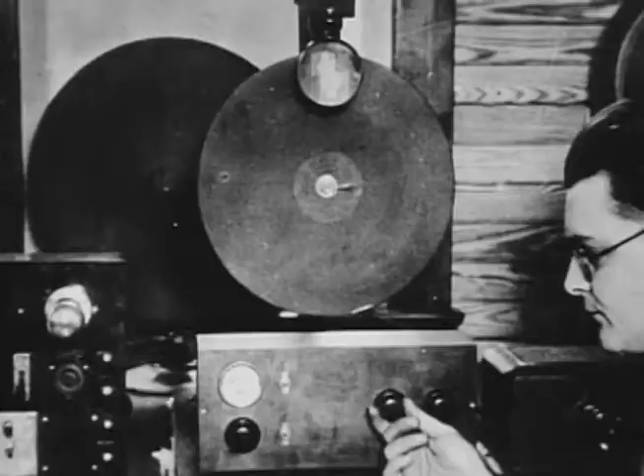Television promised precision and distance, increasingly essential aspects of an increasingly airborne conflict. An autonomous weapon could keep the pilot clear of enemy defenses. An accurate autonomous weapon could pinpoint a power plant and spare the neighborhood around it.

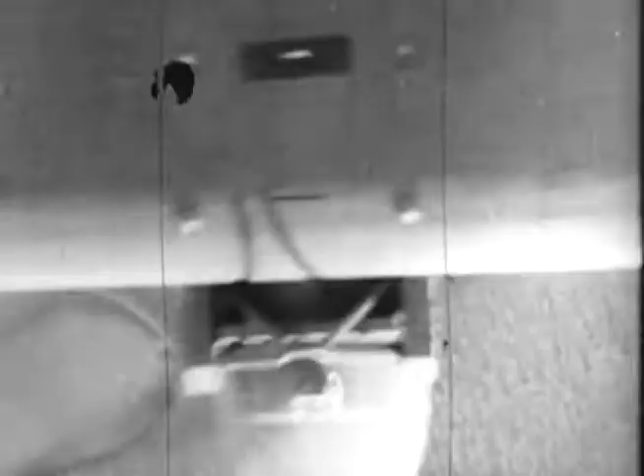That early TV technology was applied to glide bombs, small drone aircraft, and worn-out bombers packed with explosives. Weary Willy B-17s and TDR assault drones saw little combat, but proved prophetic once the technology caught up.

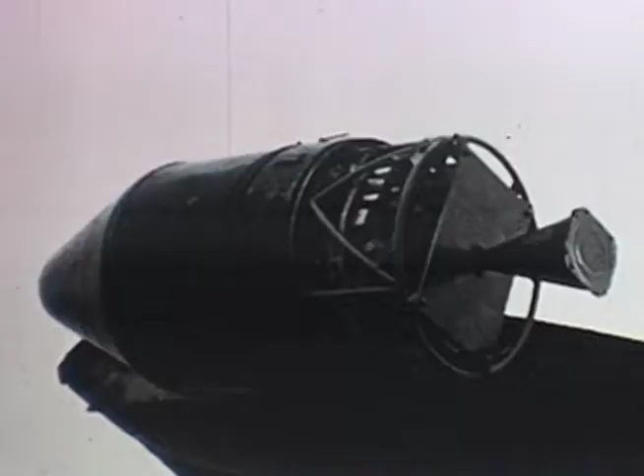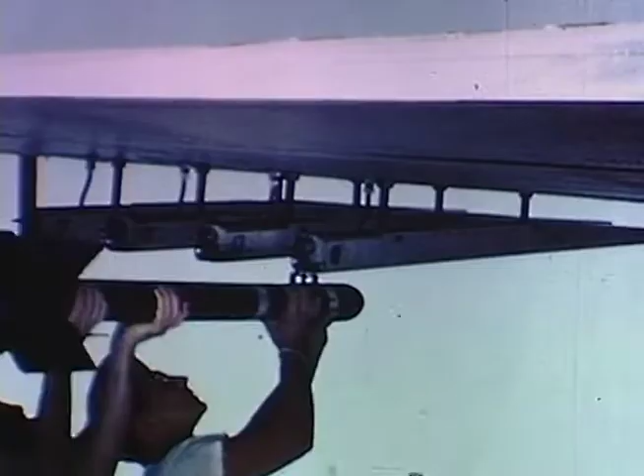Following the war, China Lake continued investigating almost every potential guidance technology imaginable: radio and radar, visible light, infrared, active and semi-active and passive, command-guided and fully autonomous. China Lake experimented with scores of schemes to put rockets and bombs and torpedoes on target, creating increasingly sophisticated evolutions of the rocket sights of the 1940s, and at the same time putting its fire control tech into the rockets.

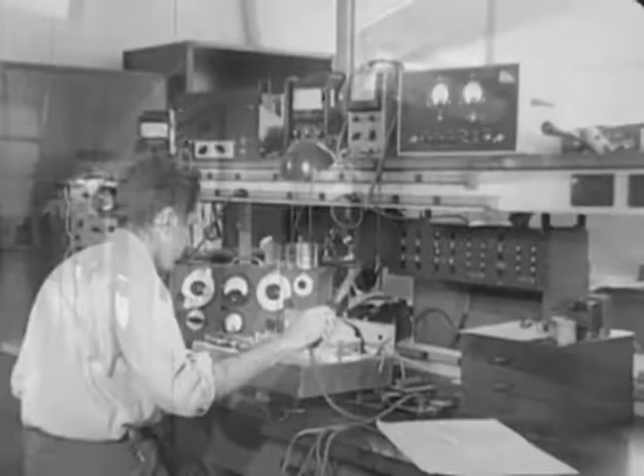And in an era in which electro-optical technology, TV, was at the cutting edge, the station was already working toward the application of its promise of precision to new generations of weapon and aircraft systems. From television-centered experimental fire control and bomb directing hardware came the ideas for an automatic tracking television guidance system.

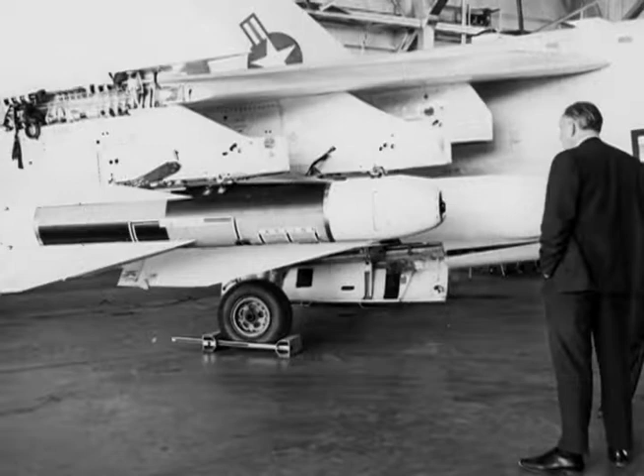Such a device had been demonstrated in 1953 at NOL Corona, but the technology of the day still didn't well support the dream. By the late 50s, though, a group at China Lake had begun demonstrating the technology and hardware for what would become the first successful autonomous electro-optical guided weapon, Walleye.

Walleye demonstrated just how accurate the TV camera could be. And the weapon's combat op-eval successes became legendary.

Larger, longer range, and data link versions followed quickly in the original Walleye's wake. And a powered version, Condor, was developed with industry for even longer range capability.

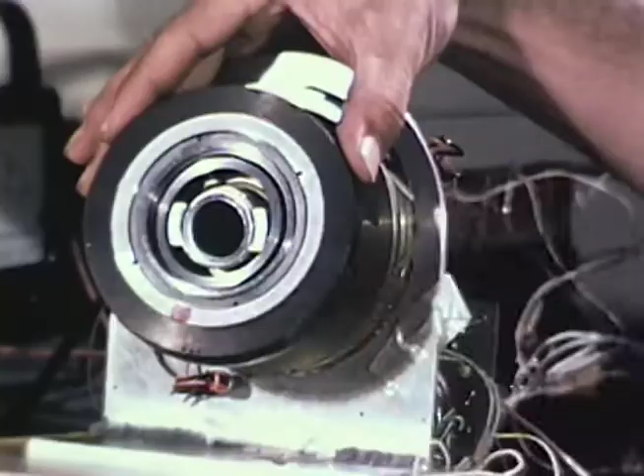In the opposite direction, China Lake designed a tiny TV missile, the Snipe, to give helicopters and light aircraft an unprecedented precision attack capability.

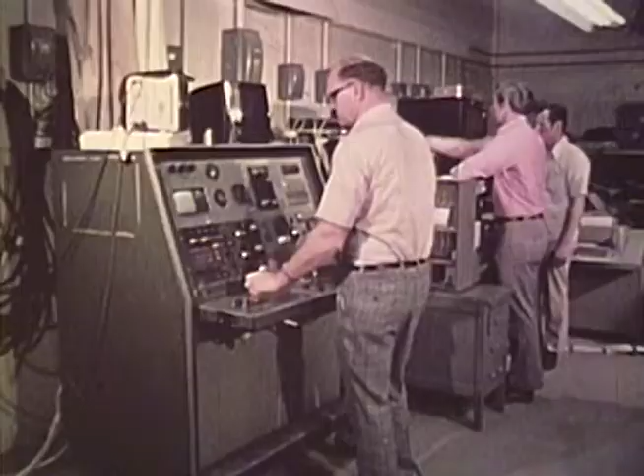The China Lake team also continued fusing TV technologies into fire control systems, such as ARBs for Skyhawks and Harriers, and early automated weapon targeting systems.

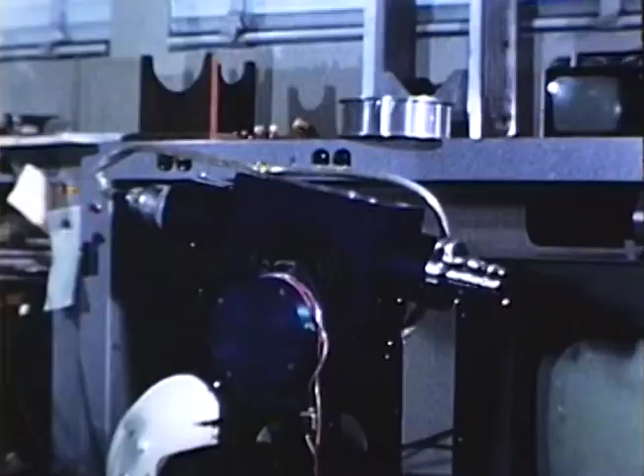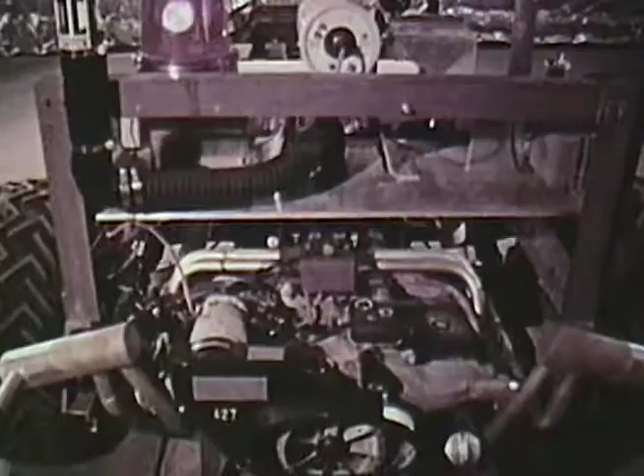The station ran the technology out to the ranges, too, with both in-house innovation and off-the-shelf application for data collection and drop scoring and event control. The station put TV into sophisticated remotes to support T&E and simulation as targets and as test platforms.

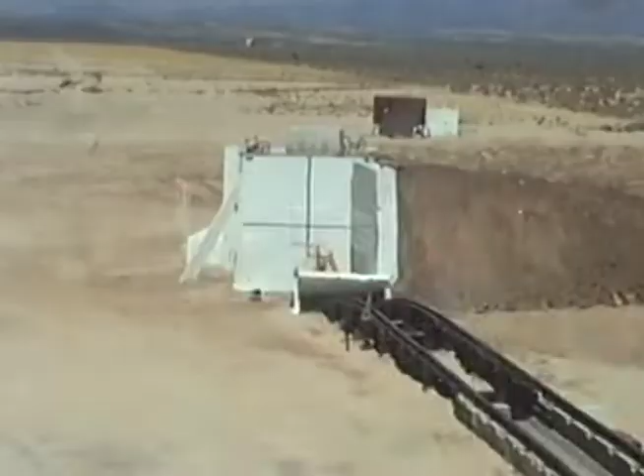And China Lake presented full-on fighters to its developmental missiles. China Lake's instrumentation efforts also resulted in the creation of the shuttered video technology that would become industry standard.

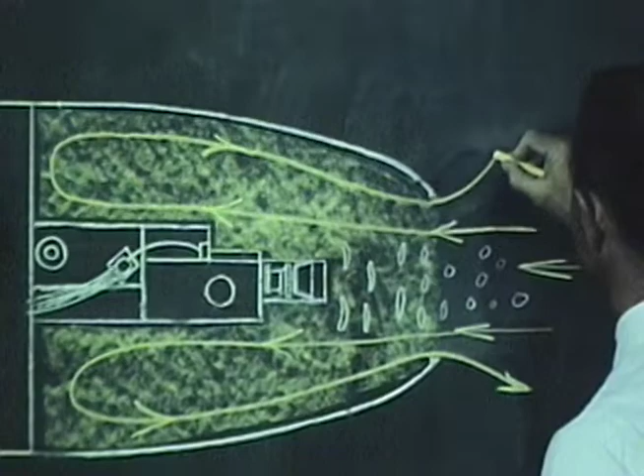And many of today's lumbering giants of the battlespace, weapons little evolved from the convertibombs that tried to displace Walleye in its early days, owe much of their seeker and data link technology to those China Lake efforts, as do the guidance systems for harpoons that turn them into SLAMs, and the radical CCD imagers for air-to-air missiles.

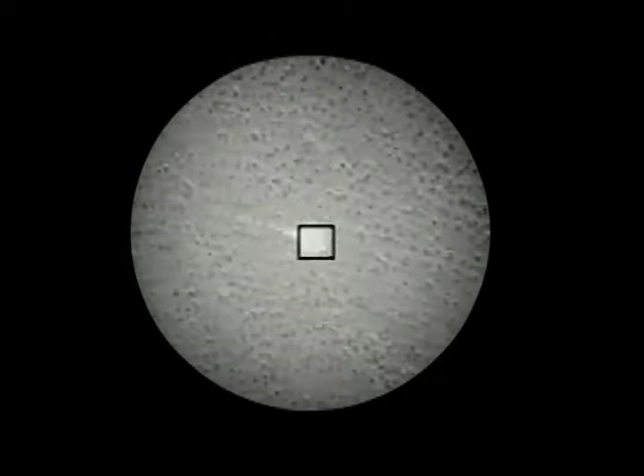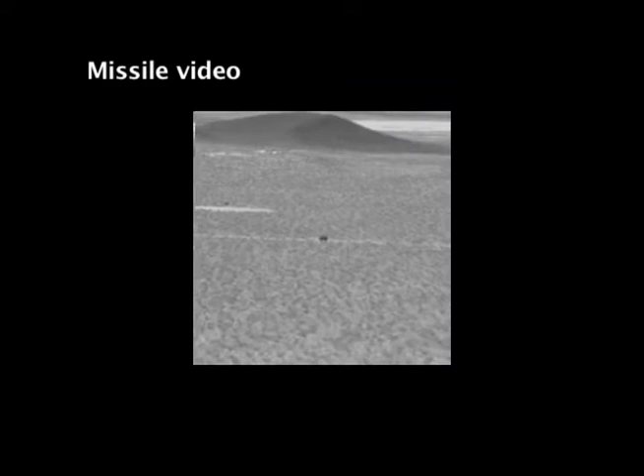And a new generation of imaging technologies has spawned a new generation of weapons. Tiny, elegantly simple, and unerringly accurate, whether fired from ship or shoulder, helo or Hummer, rubber boat or toy plane. The little Spike is a new kind of weapon for a new kind of war.

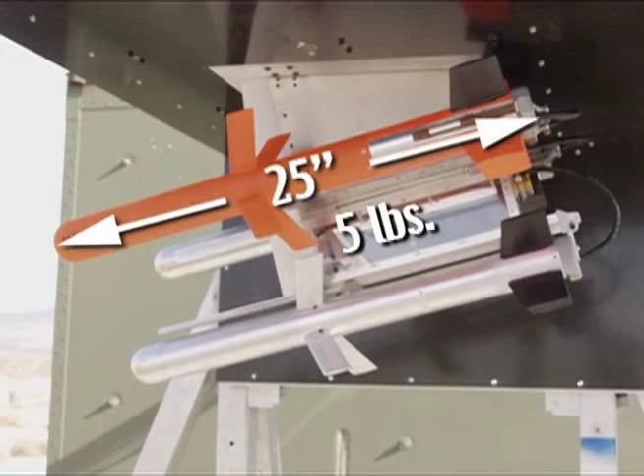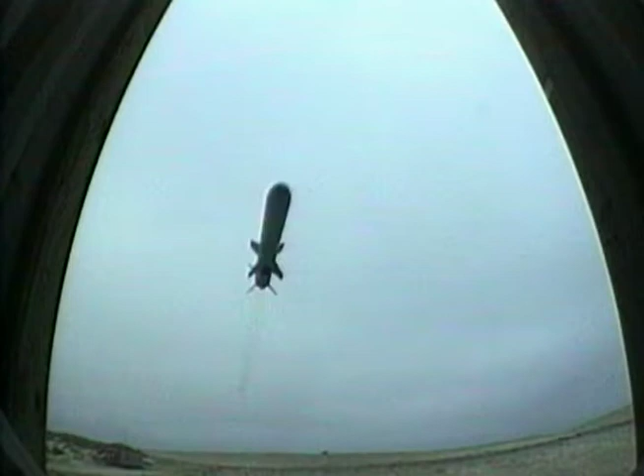The pursuit of precision continues, with the electro-optically eyed descendants of Weary Willie and Walleye wearing imaging seekers that are as far from the TV guidance packages of the 1960s as those were from the mechanical TV scanners of the 1920s.

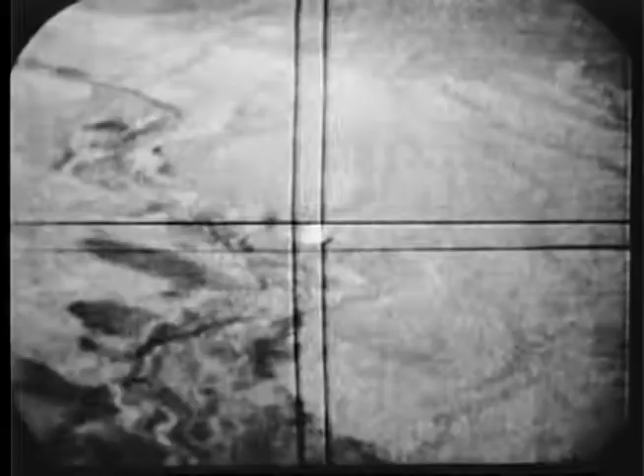Compact, computer-packed automatons with seekers that can see through haze and darkness to pinpoint targets from the air and from the shoulder, with the ubiquitous offspring of the data link pods controlling nearly everything in the battlespace arena. But that's another story.

Bombing a well-defended tactical target has always been a difficult mission. Anti-aircraft fire harasses the bomber in the target area, reducing his accuracy well below scores achieved during training missions. Operational commanders must therefore send out more ordnance to knock out a specific target, but they are hampered by not having enough aircraft to cover all significant targets in any one combat area.

One answer to this compound problem is Walleye, a glide bomb developed by the Naval Ordnance Test Station. This revolutionary weapon is guided by a self-contained automatic tracking television system, which frees the pilot of further control responsibility after launch and allows him to escape or attack other targets.

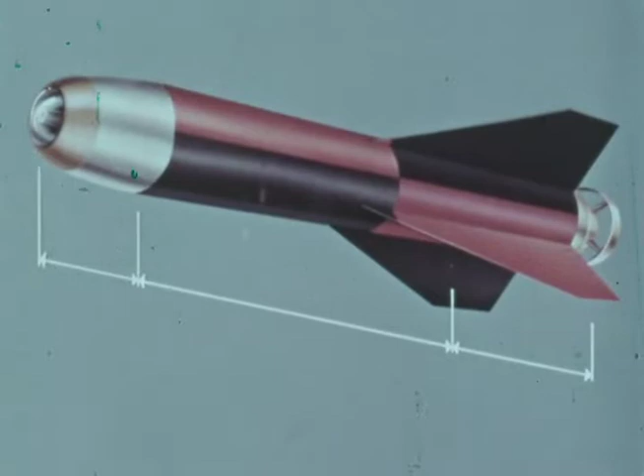The 1,100-pound Walleye is 11 feet 4 inches long, 15 inches in diameter, and has a 45-inch wingspan. The weapon consists of 3 basic sections or subsystems: guidance, warhead, and control. Over 80% of the total weapon weight is warhead. The high payload-to-weight ratio is a benefit derived from the absence of a propulsion unit.

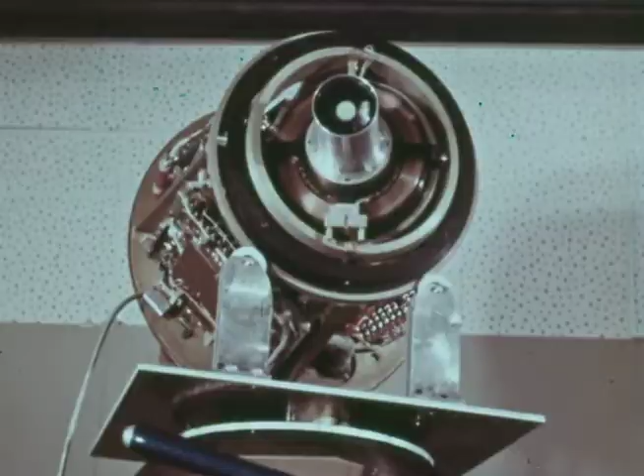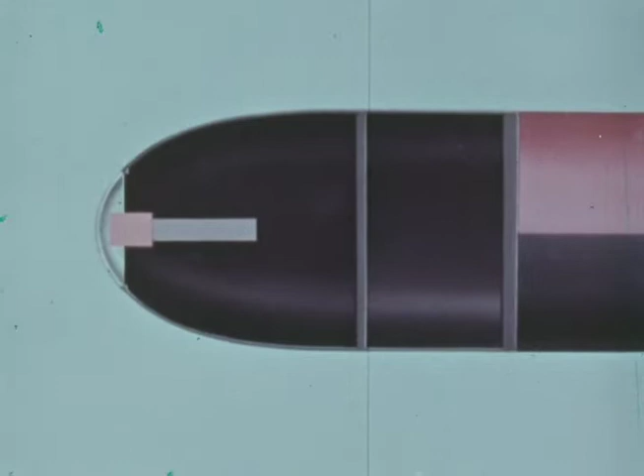The Walleye guidance system combines a gyro-stabilized television camera with a passive, automatic tracking system. The sensing element is the camera, consisting of a lens and a Vidicon tube mounted coaxially with a gyro. The assembly is supported by a gimbal system which allows the camera to move through an angle of 30 degrees in any direction.

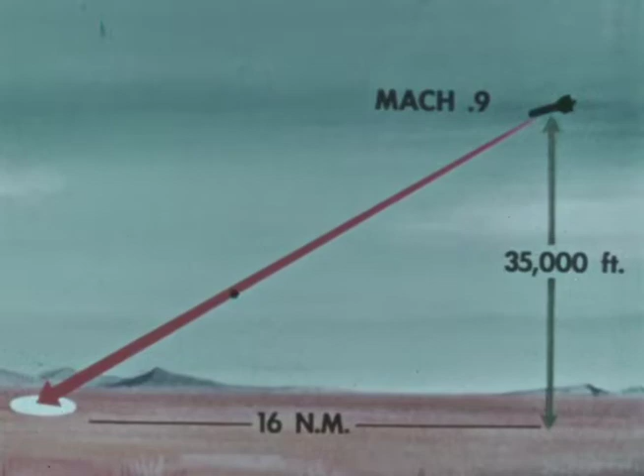After launch, Walleye takes a glide path instead of a short ballistic trajectory. Under nominal launch conditions of Mach 0.9 and a 35,000-foot altitude, Walleye can attain a maximum range of 16 nautical miles with a glide ratio of 3 to 1. Launched as low as 200 feet off the deck, the weapon can glide for 4 nautical miles.

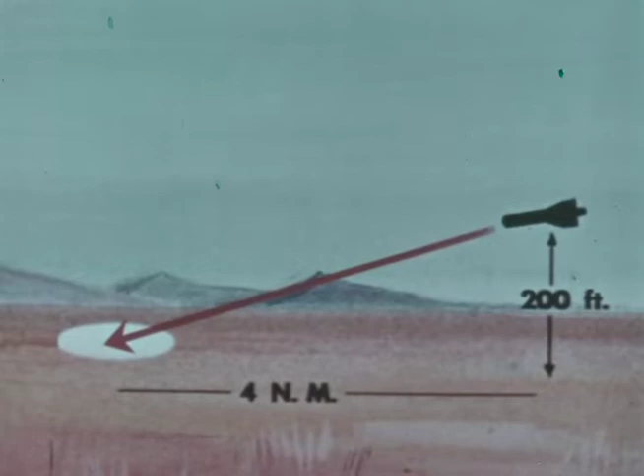The warhead, developed expressly for Walleye, is a linear-shaped charge with a star-form cross-section. The charge, encased in a steel jacket, exerts more destructive force than a conventional 1,000-pound bomb. First, 8 tight beams of high-velocity steel fragments rip through the target at more than 11,000 feet per second, followed by the blast of a high-pressure shock wave.

Test warheads have torn through 4-inch steel at distances of 20 feet and have shattered reinforced concrete 4 feet thick.

Walleye en route and launch procedures are quickly learned. Prior to every mission, the pilot will, of course, run through the Walleye ground checkout. Arriving in the target area, he switches on master arm and begins the attack.

He acquires the target in his gun sight, shifts to the display, and maneuvers to put the target in the crosshairs. As he does this, he presses and holds the trigger switch to uncage the gyro and watches for the abrupt, unmistakable lock-on. Holding the trigger, he presses the bomb release. Display and ready light black out as Walleye drops away.

The pilot now is free to escape or attack other targets. Within the weapon, automatic tracking assumes control. The camera continues to feed video information to the tracker, which generates control signals steering the weapon toward the target. As the target image expands, Walleye's seeker tracks newly resolving details until the moment of impact.

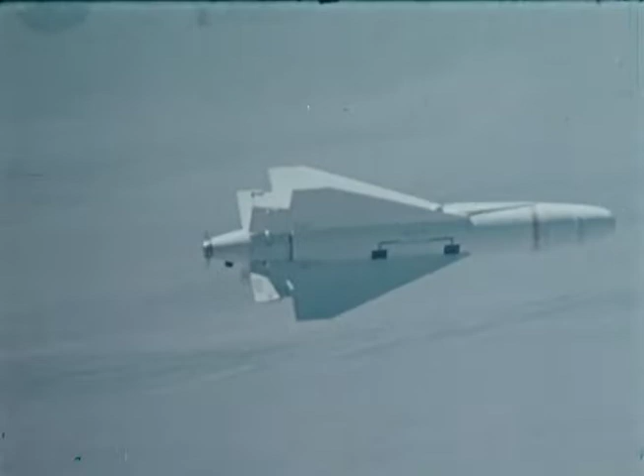The launch aircraft acquired the target at 10 miles and the Walleye locked on. The Walleye was launched on a flight to demonstrate the missile's level launch, low altitude, long standoff capability.

The target was a harbor utility ship underway at 10 knots on the Pacific Missile Range. As planned, Walleye hit the ship at the base of the superstructure. The ship was totally destroyed.

Between January and July 1973, Walleye hit within its CEP on all 10 launches. 9 of those were direct hits. Walleye 2 Extended Range Data Link is now the only system of its kind which has been combat proven.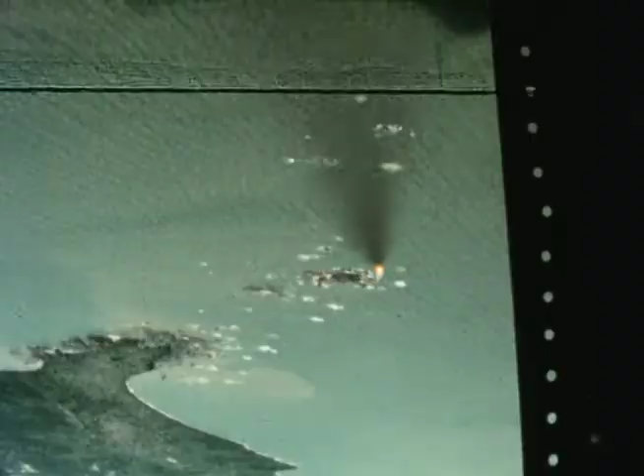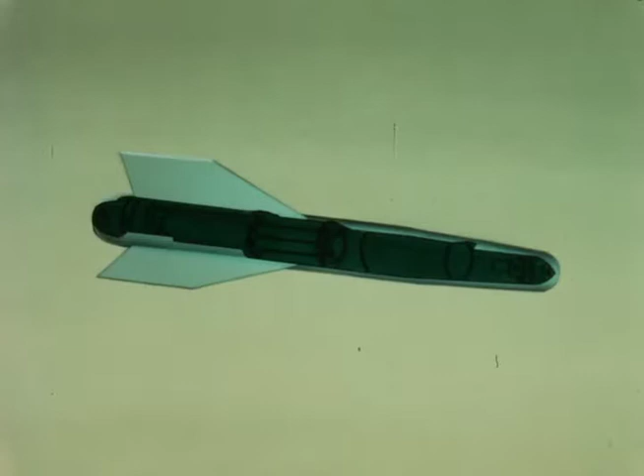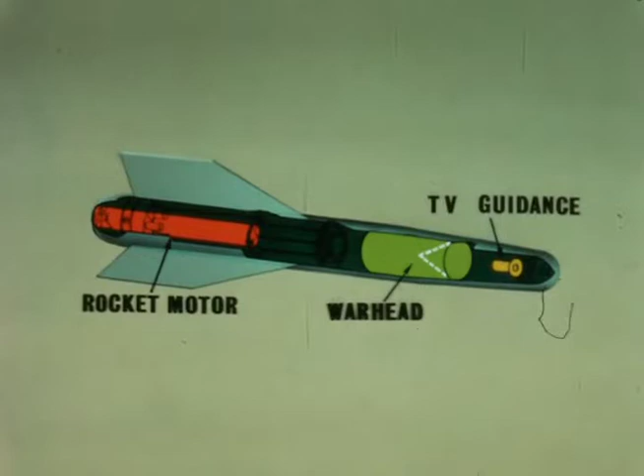The Snipe weapon is one answer to this question and is currently under development at the Naval Weapons Center, China Lake. Snipe uses a television seeker for automatic target tracking and a rocket motor for zero-velocity launch conditions. Its shape-charge penetration fragmentation warhead is devastating against such targets as tanks, trucks, gun emplacements, and personnel.

Snipe's design philosophy permits a vehicle to shoot, then scoot. This was the first purely ballistic ground firing of the weapon, performed in March of 1967, to obtain data on airframe launch characteristics. The standard 2.75 rocket motor is capable of accelerating Snipe to a speed of 550 feet per second from a zero-velocity platform.

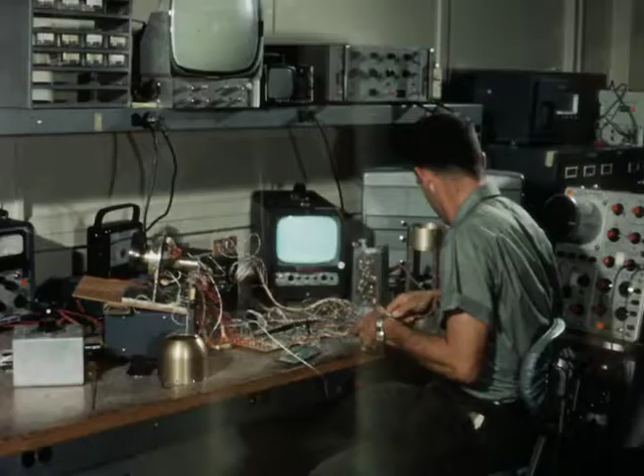The eye and brain of the weapon is its TV guidance system. A Vidicon tube is fixed to the airframe. A gyro-stabilized gimbal is located ahead of the tube. The lens is free to rotate about a point equal to its center of focus, thus ensuring a sharp image on the face of the Vidicon.

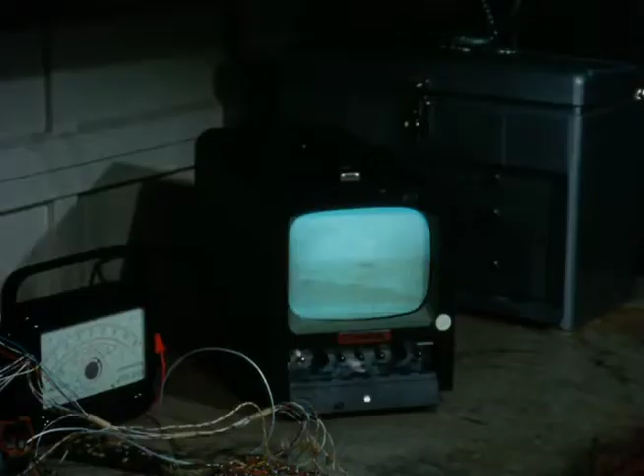In this lab demonstration, Snipe successfully tracks a simulated tank. In actual usage, the launch vehicle will carry a monitor which will display exactly what Snipe is seeing, as evidenced by these captive flight tests.

Snipe uses a new concept for electro-optical tracking. Two horizontally separated contrast points are detected, which keeps the weapon centered on target during closure. This method of tracking allows direct impact on a variety of objects.

Snipe's lightweight and compact size permits rapid attachment and multiple carriage. The weapon is prepackaged for simplified combat usage. Connection to the operator's monitor and firing console is made through the aircraft's umbilical.

Snipe's advanced guidance and monitoring system allows a series of weapons to be aimed and fired in rapid sequence. There is no need to remain in a hazardous area after weapon launch.

This was the first ballistic firing from a helicopter, filmed in slow motion. It was performed to obtain valuable launch transient data. Current tests involve firing Snipe from its proposed launch platform, the Huey helicopter.

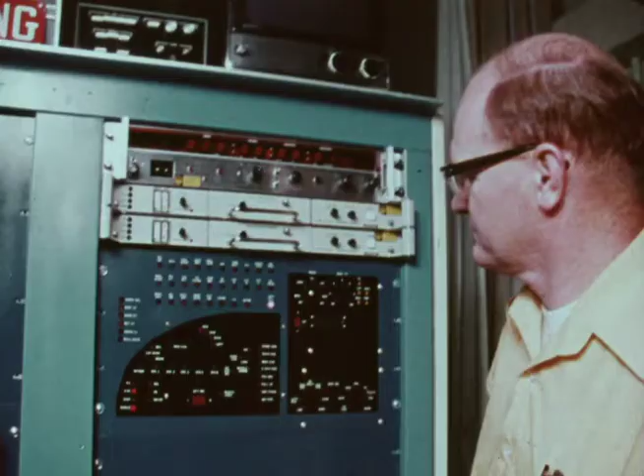As the pilot controls the aircraft and the ARBS system, selected cockpit control positions are telemetered, displayed, and recorded in the ARBS acquisition lab.

Head-up display imagery, the same as appears in the aircraft, is displayed in real time in the acquisition lab. Video imagery from the aircraft's video tracker is displayed on a television monitor.

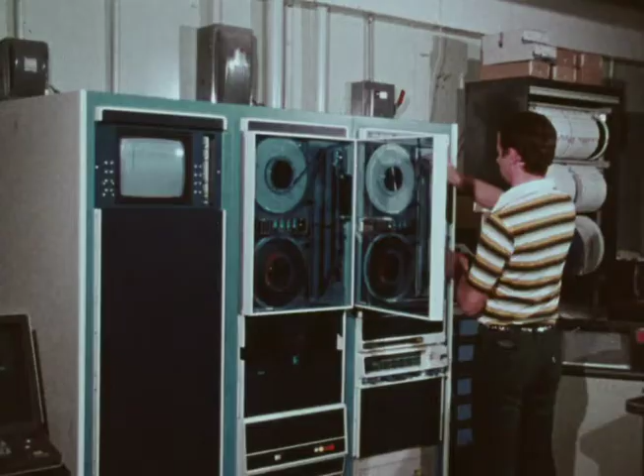A second function of the ARBS lab is the recreation and simulation of ARBS flights for detailed analysis. An ARBS system in the simulation lab is exercised as if it were flying. Flight parameters are fed to the system by a systems engineer acting as the pilot.

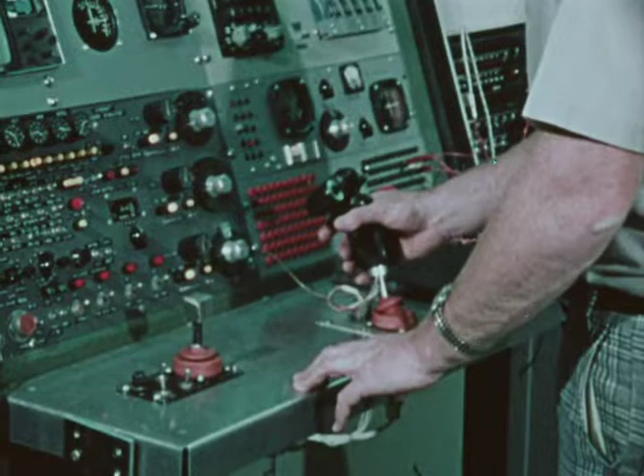Software can be developed and perfected on the ground rather than by trial and error flight testing. With the system components tested and the software package updated and debugged, the ARBS is ready for additional range tests, tests which consistently put the ordnance on the target.

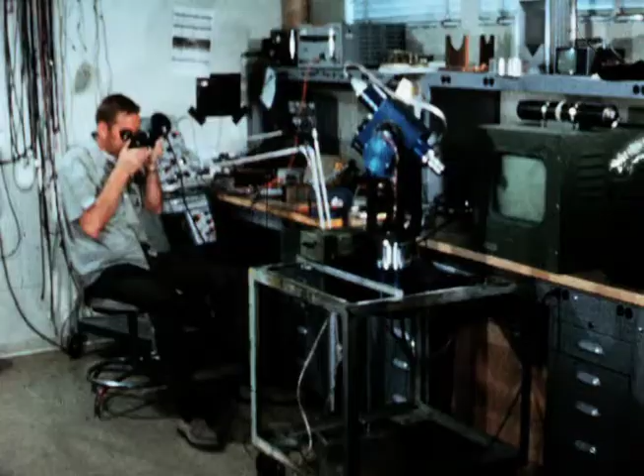The observer views, through a pair of oculars, the image displayed on a miniature picture tube. The picture tube and camera Vidicon have a 1,000 line resolution.

In these tests, the camera is mounted outside the laboratory and the operator is located inside. The operator, by the simple, natural act of looking in the direction he wishes, can view any portion of the remote camera surroundings.

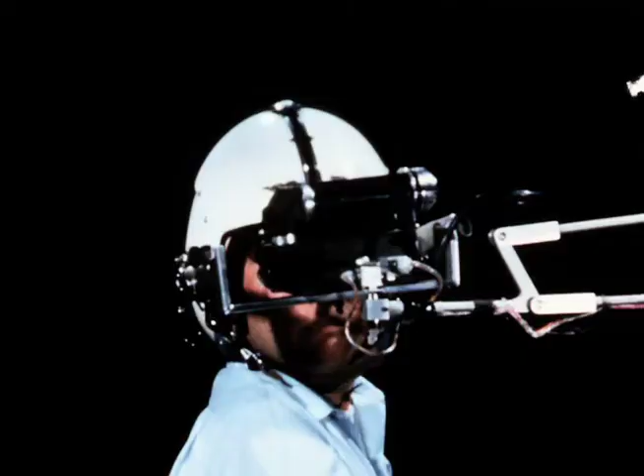Regardless where the operator is located with respect to the camera, he has the visual sensation of being at the camera's location. At the same time, his hands are free to perform other functions that may be required.

Provided with remote control manipulators, he would be able to perform many tasks in situations where remote surveillance and the ability to work at a safe distance is desirable.

One of the prime objectives of the program is to explore the feasibility of using head-coupled television aboard ships to acquire, track, and designate targets directly to radars or indirectly through fire control computers.

Optical tracking systems are particularly useful in instances where targets are difficult for radar to acquire, such as shore targets or low-flying aircraft and surface vessels.

The head-coupled TV system bypasses many of the limitations of present optical trackers. When using current tracking systems, an operator must translate what he sees through his brain to his hands, arms, and legs in order to keep the optical tracker on the target.

The task requires a high degree of physical coordination in manipulating the director while compensating for ship's motion. The head-coupled system would use the natural movements of the operator's head to generate tracking signal input to a fire control computer.

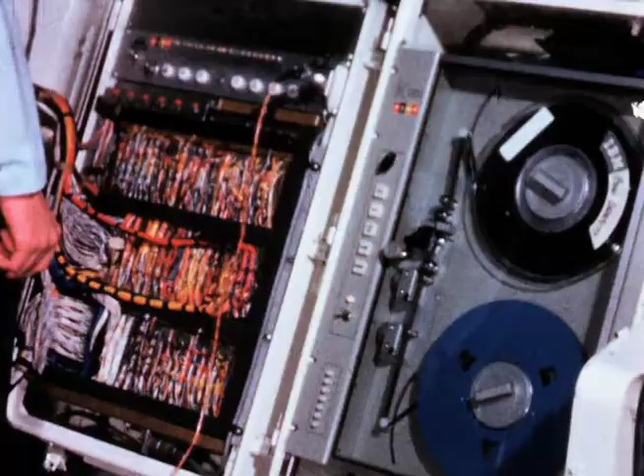Analysis of the accumulated data revealed that head coupling not only resulted in a high degree of tracking accuracy, but also demonstrated the ease with which the operator could perform his tracking function.

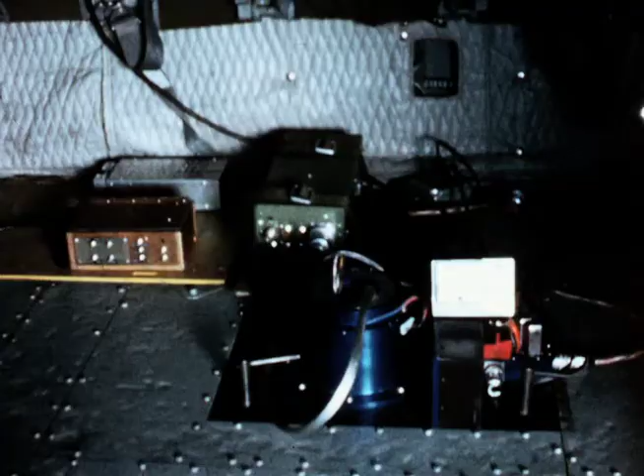Exploring other possible applications of the system, engineers conducted a series of experiments aboard a helicopter. Test equipment, video recorder, and camera were secured to the cabin floor, converting the craft into a flight laboratory.

Engineers in the cabin, acting as trackers, were able to locate and track both stationary and moving targets even while the helicopter was flown through various maneuvers.

The head-coupled TV system is a human factors approach to tracking and remote surveillance that ties man and machine together. Visual, mental, and physical processes are translated into electrical signals via the shortest and simplest route, the natural movements of the operator's head. This program is an example of exploratory development at the Naval Weapons Center, with the potential of broad industrial and military applications.

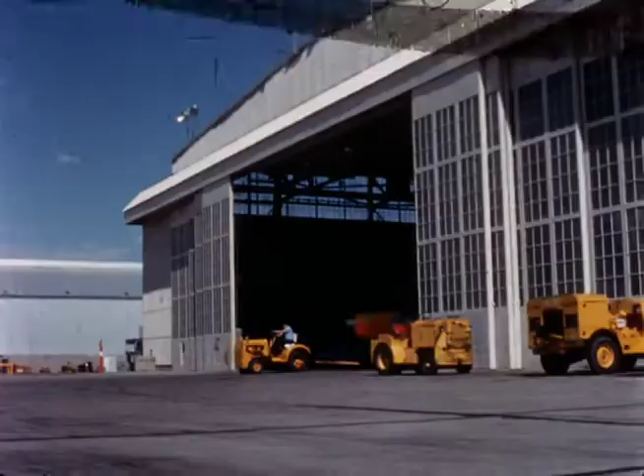However, until recently, attempts to provide effective flight and control of drones in formation have been unsatisfactory. At the Naval Ordnance Test Station, a method has been evolved for presenting two target drones in well-controlled formation flight.

This NOTS method of dual drone formation control is based on the employment of a television camera system and data link. These are integrated with the standard drone control tools of radar, telemetry, and radio.

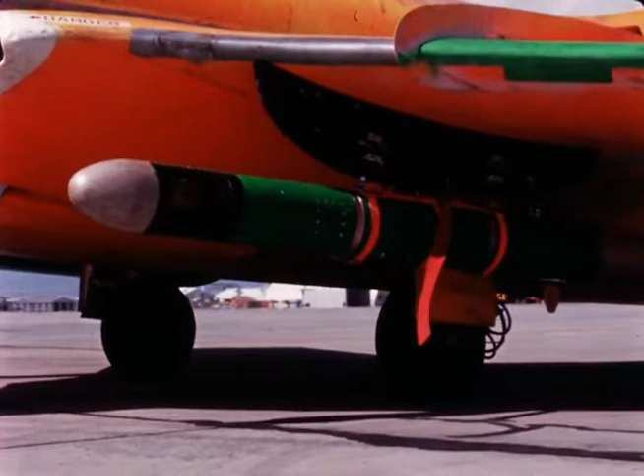The essence of the method is flight control of the second drone through visual observation transmitted to ground control by the television camera carried in the lead drone.

The mirror in the forward section is mounted at a 45-degree angle to the flight path. This permits the forward-pointing camera a side field of view. The mirror mount is motorized and can, by remote control, provide a variation of 60 degrees in the horizontal plane and 40 degrees in the vertical plane. This capability facilitates acquisition of the second or slave drone.

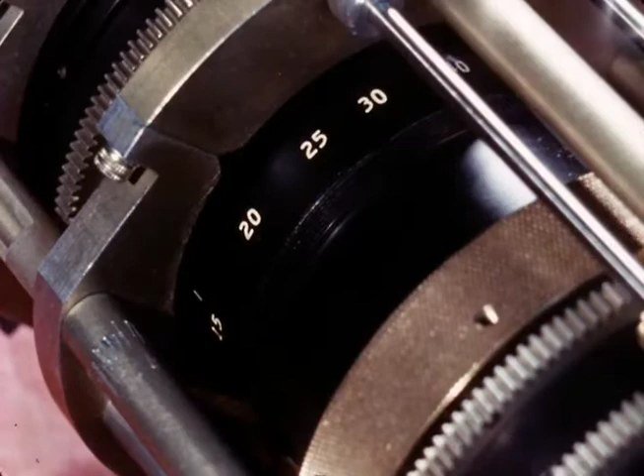In the camera section, the remotely controlled zoom lens can provide a field of view varying from 4.8 to 48 degrees.

The TV drone, tail painted green for easy identification by control aircraft, carries a dummy balancing pod under the wing opposite the TV pod. The slave drone carries two dummy pods so as to present a uniform radar profile for the missile control system.

First launched is the slave drone. Takeoff is standard NOLO procedure. A T-28 aircraft takes over the airborne drone. The T-28 delivers the slave target to its control aircraft, which has been orbiting a rendezvous point. The TV drone is launched.

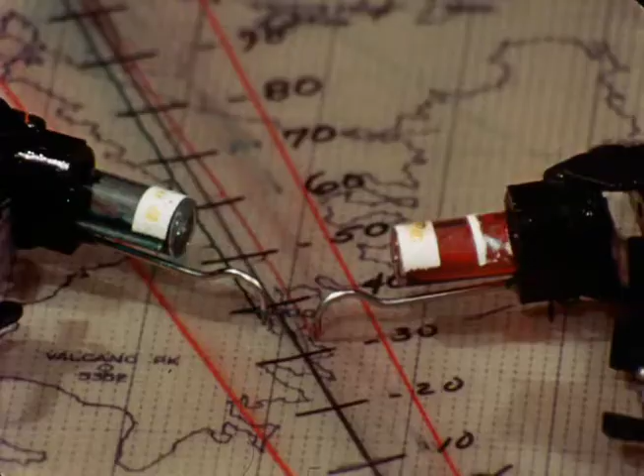The standard NOTS test course for formation drone control is an oval racetrack pattern. Minus 30 seconds. The missile ground control plots the two drone formation and prepares to fire.

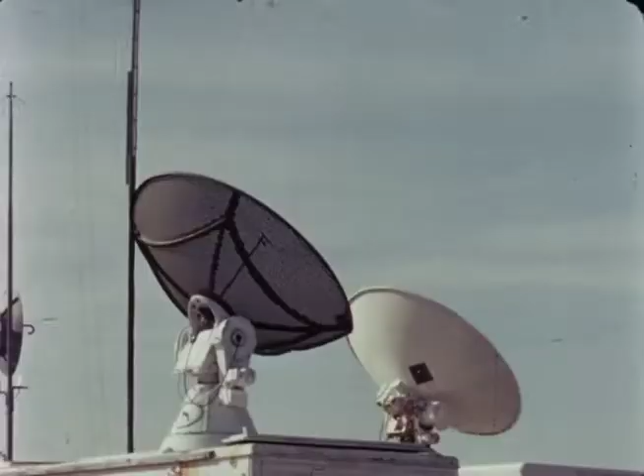Smoke is keyed on each drone. The drones, under complete remote control, fly straight and level. Missile is launched.

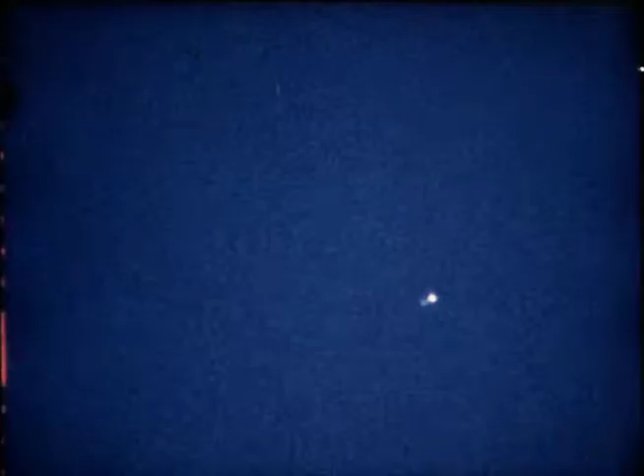In the event of an aborted test, control aircraft once more take over the drones and resume the test pattern. After all presentations of the target are completed, the target aircraft are flown back for standard NOLO landing recovery.

This NOTS-developed TV manual control system for presentation of dual targets has provided a satisfactory solution for initial formation target test requirements. Testing thus far has been largely successful, and both ground-to-air and air-to-air intercepts have been accomplished with this interim system.

On March 30th, 1973, the first successful flight of the QF-86H occurred at the Naval Weapons Center, China Lake. The QF-86H is a real-size, all-attitude, highly maneuverable, remotely piloted vehicle. It will be used to test air-to-air weapon systems in a realistic air combat maneuvering environment. The aircraft will retain man rating.

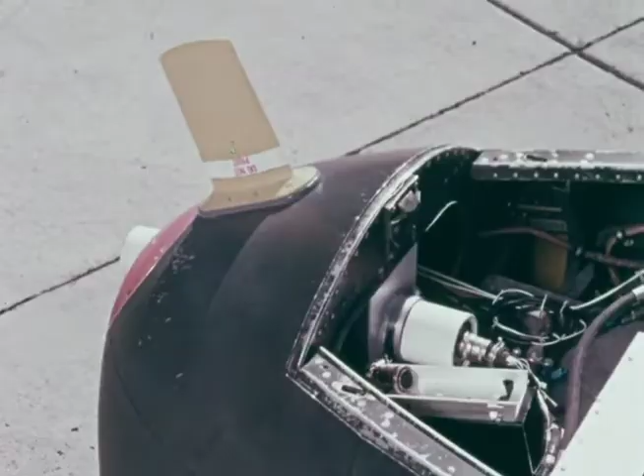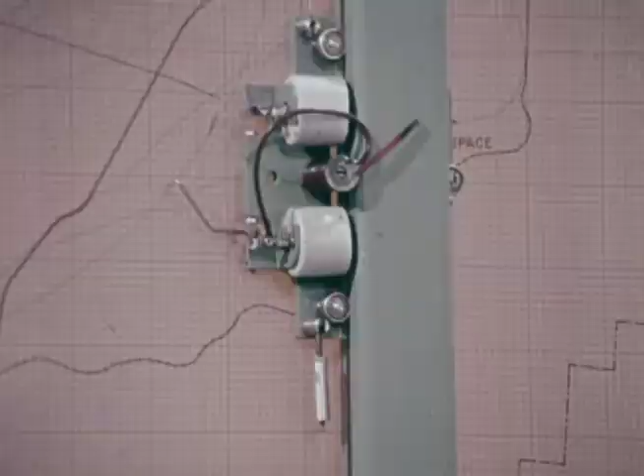The target system consists of the QF-86H aircraft, a ground control station, and an MSQ-51 radar van. A standard television camera provides the remote pilot with a 45-degree forward field of view. The remote control pilot flies the aircraft from an actual F-86H cockpit located in the ground control station. A TV monitor and XY plot provide the pilot with vehicle position and attitude.

Rotation occurred at approximately 110 knots. Liftoff at 125 knots. Here's the takeoff as the remote pilot sees it.

The flaps and gear were intentionally left down, and 155 knots airspeed was maintained around the pattern. The runway was seen from approximately 10 miles out.

The remote pilot flared the aircraft normally just prior to touchdown. The aircraft made a 100-degree turn onto the non-duty runway. This 10-minute flight on March 30th, 1973 was the first successful flight of the QF-86H, an air combat maneuvering all-attitude target system. It could be the harbinger of realistic weapon systems test and evaluation.

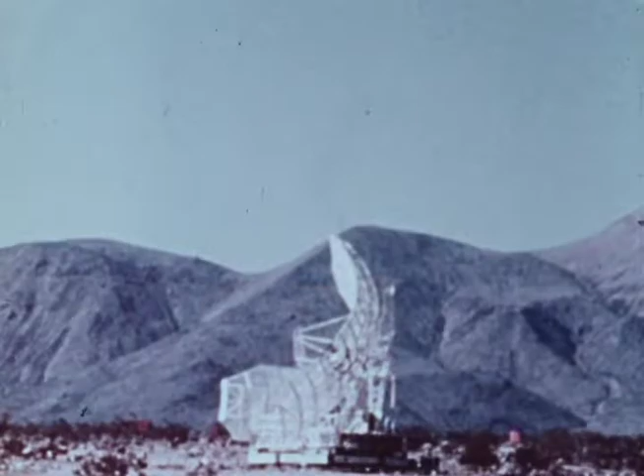Targets. All shapes, all sizes. Targets to test the effectiveness of prototype weapon systems. Targets which realistically simulate enemy installations. Targets which simulate the known operational characteristics of enemy combat aircraft. Full-scale targets like these offer accurate infrared signatures and realistic radar reflectance. They can recreate documented and estimated combat maneuvers.

The Navy's newest air target is the cost-effective QT-38A. Using surplus Air Force T-38A airframes, NWC, with contractor support and under the Naval Air Systems Command sponsorship, is building a series of cost-effective, remotely piloted, full-scale targets.

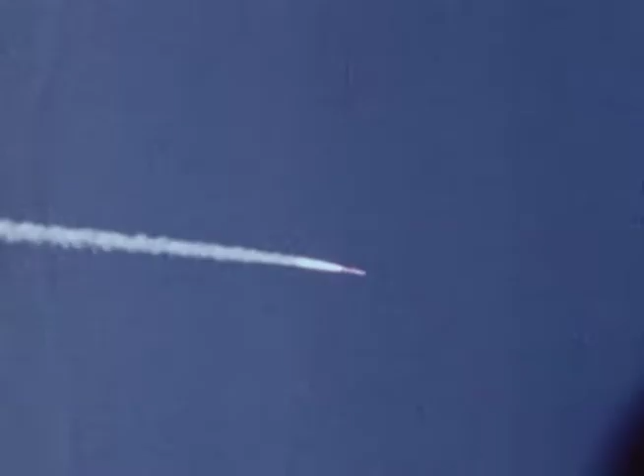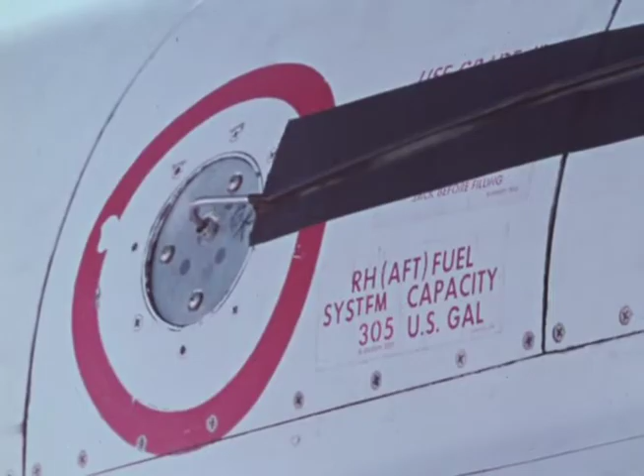If the first missile doesn't destroy the target, additional presentations can be made on the same flight. For safety reasons, targets knocked out of control are destroyed by the flight termination system. If the shooter aborts the mission or the weapon doesn't seriously damage the target, the QT-38A is brought home. Again, the remote pilot has complete control of the aircraft as he brings it in, using the television monitor as his guide.

The QT-38A is reliable. The cost is less than subscale targets. Performance realistically simulates enemy aircraft. The system is available now.

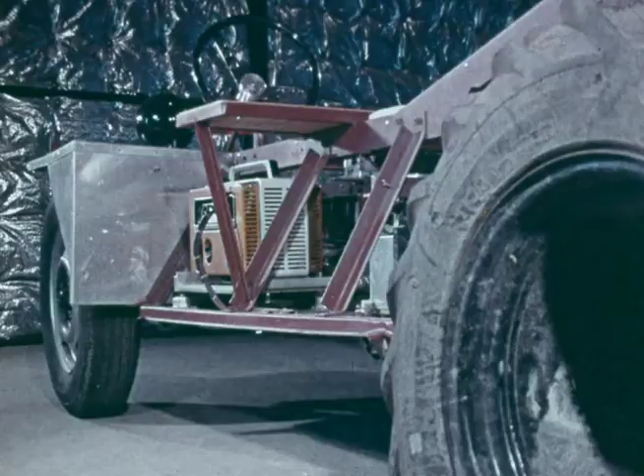Volkswagen chassis, a 65 horsepower engine, a 3-kilowatt generator, and a TV camera. The nuts and bolts of the Naval Weapons Center's remote-controlled dune buggy.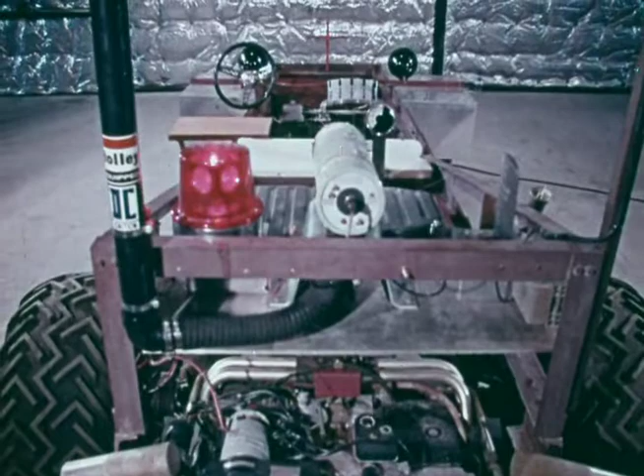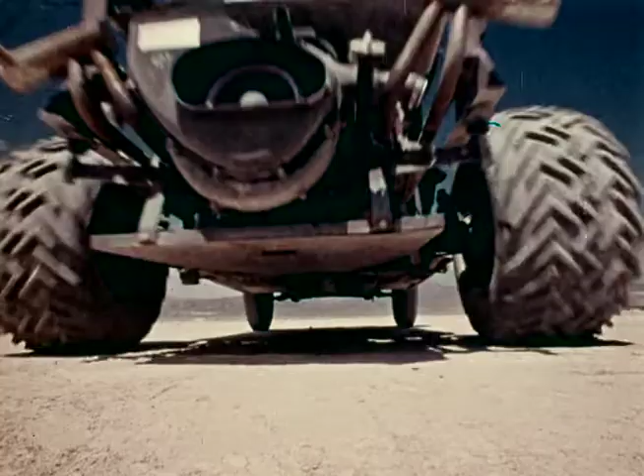The dune buggy is a drone vehicle able to simulate maneuvering sea targets. It can maintain a constant or variable velocity. It can make smooth, continuous turns and is also capable of zigzag maneuvering. Maximum speed is 60 miles per hour.

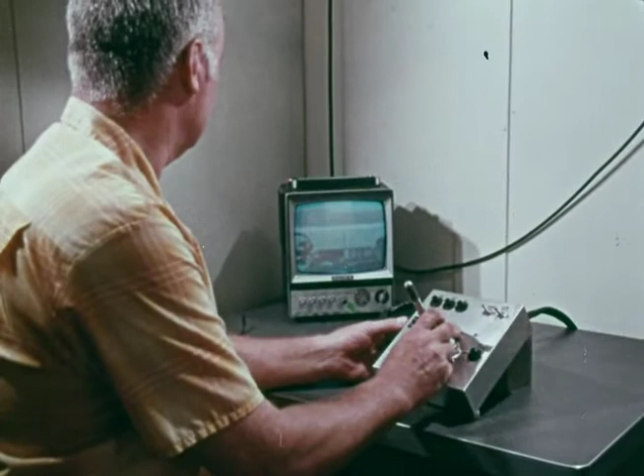The remote controller steers the vehicle from within a mobile control van. A TV camera mounted on the vehicle provides the controller with a 5-degree forward field of view. The speedometer and throttle indicator display vehicle velocity and position. The dune buggy is visible to the eye from a slant range of approximately 15,000 feet. It can be augmented for visibility on an airborne radar.

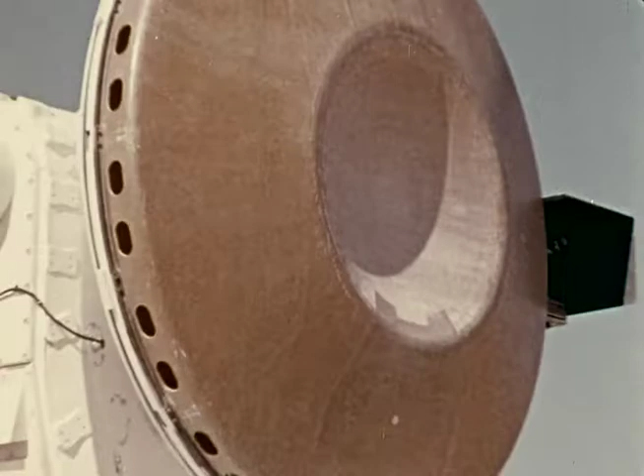The time position tracking system developed at NWC enables vectors to be derived between the moving target, the aircraft, and the weapon impact. Data accuracy is within 10 feet. The system consists of azimuth encoders and TV cameras for target tracking, a radar station for aircraft tracking, a data computation room, and a data reduction room.

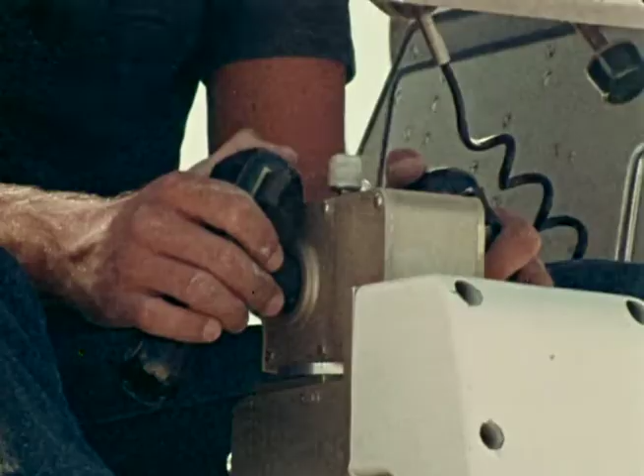Located on 2 cine-sextant tracking camera mounts, spaced 1.5 miles apart, the azimuth encoders and TV cameras provide continuous plotting of target motion and weapon impact. The digital encoder data is inserted on the TV video at each camera site. The images are then combined with range time and microwaved to the data computation room. Here, the images are displayed and recorded in a single video format.

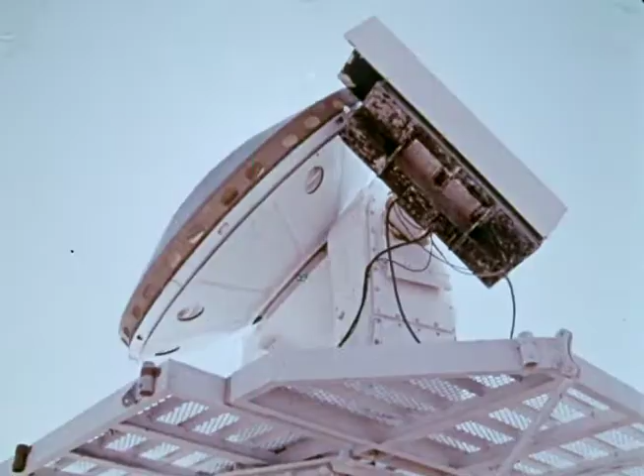Aircraft tracking is done by a ground radar station. Range, bearing, velocity, and release point are plotted for analysis in the data reduction room. In approximately 24 hours, data can be reduced with an accuracy of 10 feet. A calculator rotates and parallaxes data monitored from the TV video and correlates it with data produced by the radar. The end result is a continuous plot of vehicle motion synchronized with aircraft flight path, weapon delivery, and impact.

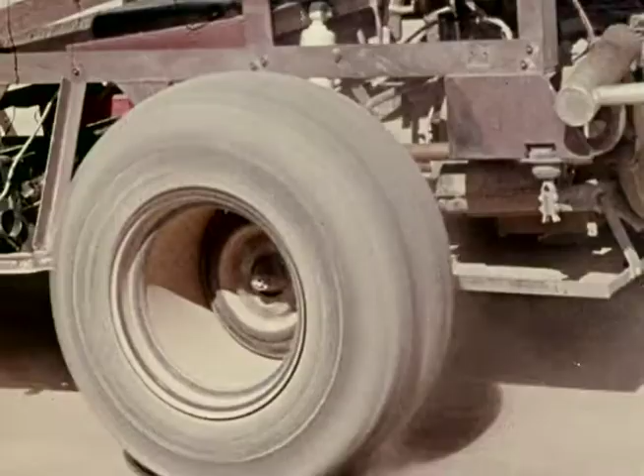The remote-controlled dune buggy is the first land-based drone vehicle to adequately simulate maneuvering sea targets. It is a low-cost, lightweight target with high performance and reliability. Together with the time-position tracking system, the dune buggy requires no setup time between aircraft passes. As many as 24 passes can be made in a 1-hour period. Dune Buggy 73, NWC's newest contribution to drone technology.